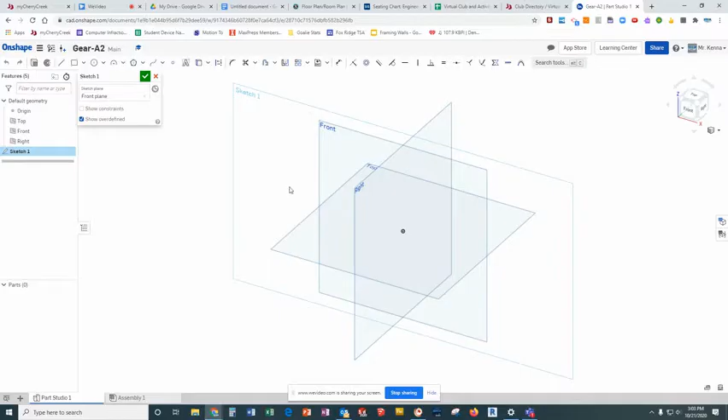In OnShape to make a gear, we're going to start out with our first sketch. Our first sketch needs to be on the front plane. So I'm going to select the front plane and select the sketch tool. You can also do that backwards if you'd like. To view the front, I'm going to come over to my view cube and click on the front so I'm looking straight at it.

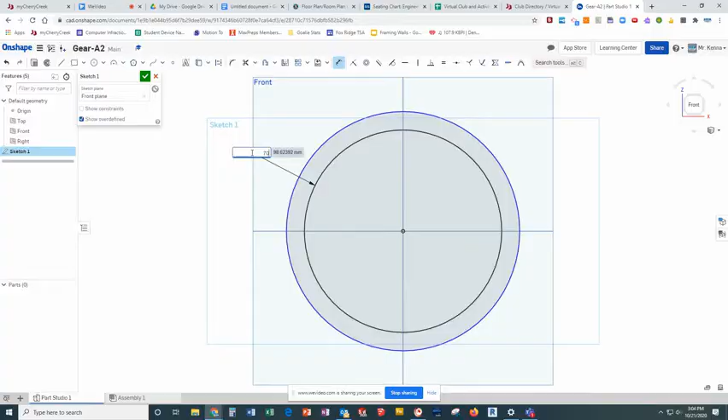The first thing I'm going to start with is a center point circle. I'm actually going to make two at the same time, both starting from the origin. Then I'm going to grab my dimension tool. The inner circle diameter is going to be 70 millimeters. The outer circle's diameter is going to be 90. That gives me about a 10 millimeter tall tooth all the way around my gear.

The next thing I'm going to do is start to add in some construction lines. When I do construction lines, I can either activate the construction first or activate the line tool first. Both just need to be blue. You can also change this later.

The first thing I'm going to do is draw a construction line straight up in the air like that. I'll hit escape, do it again, this time the other way - line tool, then construction - and draw from the center up. We're going to dimension this with an angle later.

The third one - if you happen to accidentally, as I just did, draw this as a regular line, you can select it and change it to construction later on.

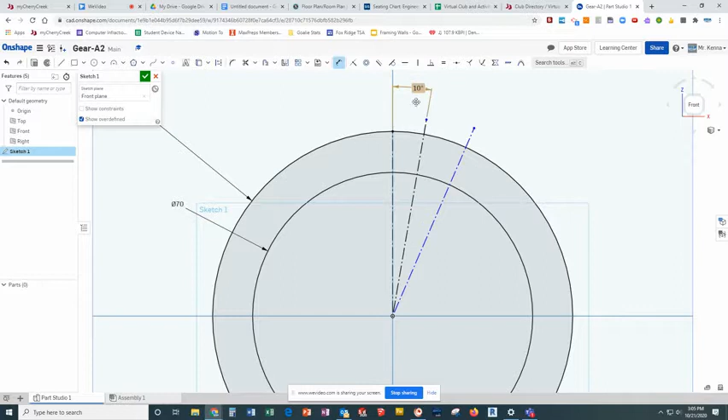Now I'm going to use my dimension tool. From the center, or the one that's straight up, to this one, in this case we're going to use 10 degrees. From this line to this line is also 10 degrees. You'll notice they get fully defined as they change from blue to black.

Ultimately what I want is to draw one tooth in this area and one valley between the teeth in this area, and get the entire profile. But if you look at it right now, if I make this the tooth, here to here to here, the tooth is wider at the top than it is at the bottom, which means it's going to get stuck and my gear is not going to work.

So what I'm going to do is use my line tool and draw from the part where those two intersect. You'll notice both of them turn orange. Click release, and I'm going to make sure I draw a non-vertical line up to here.

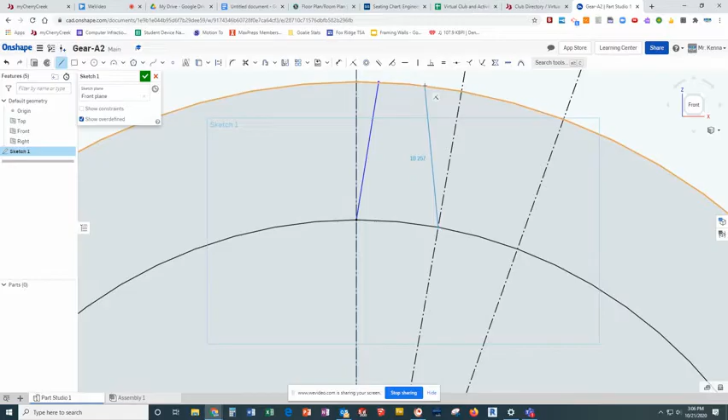I'm going to hit escape, get the line tool again, and again start where these two intersect. A non-vertical line, not parallel - don't do anything, just make sure it's coming up and touching the edge. And put that there. You'll notice they're uneven, which is fine.

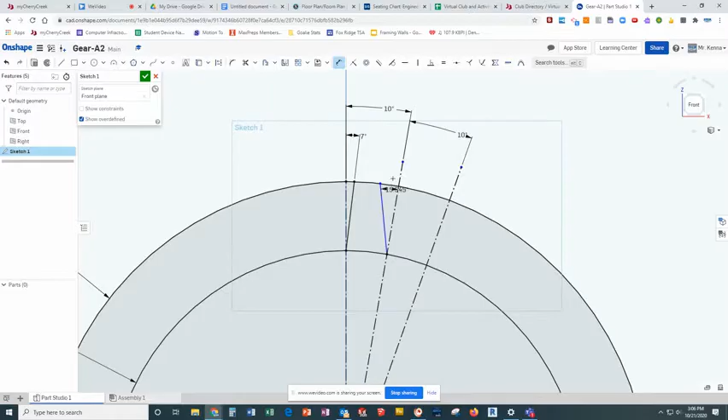I'm going to get my dimension tool, and again use a degrees dimension. Just move this down a little bit. From the construction line to this line is 7 degrees. From this line to this construction line, again at 7 degrees.

You'll notice now if I follow the profile of the tooth as being from here, up, over, and down, the tooth is now narrower at the top than it is at the base. This is going to give me a gear tooth that actually works.

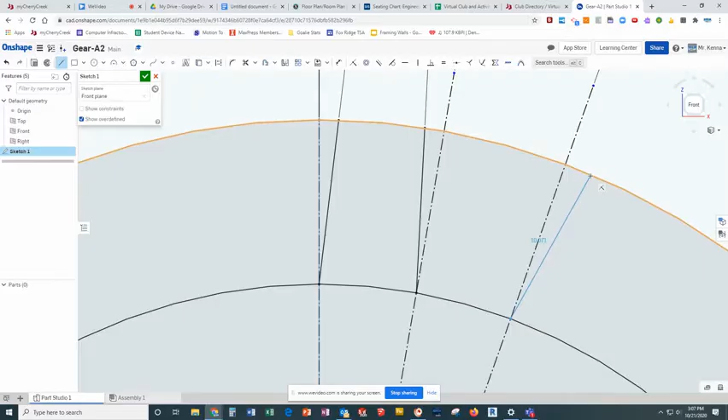Now, just because I'm going to set up a full path from here, up, over, down, over, and transitioning into the next tooth, I do need to do this one more time. So I'm going to get my line tool, start where these last two intersect, and draw up. And I'm going to take my dimension tool from here to there, also at 7 degrees. This is basically the edge of the next tooth. That's what I have set up here.

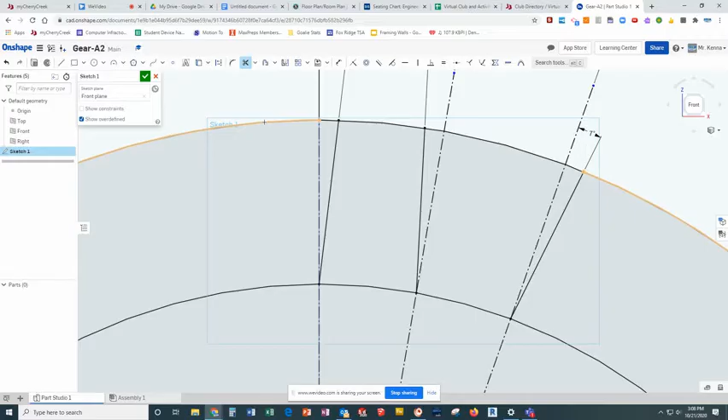Now, because I need to round these corners off, that's actually why I did this part as well - I need to round some of these corners off. The easiest way to do that first is to use my trim tool and get rid of all the normal lines that I don't need. So I'm going to click trim, and get rid of most of the circle. You can see it's cutting all the way outside my view back around to the other edge. That's gone.

I'm going to do the same thing down on the lower section as well. The lower circle, that's gone too. This little piece I don't need - it's not part of the gear tooth. The gear tooth comes up, goes over, and goes down. So this part is not part of the gear tooth, nor is that, nor is this.

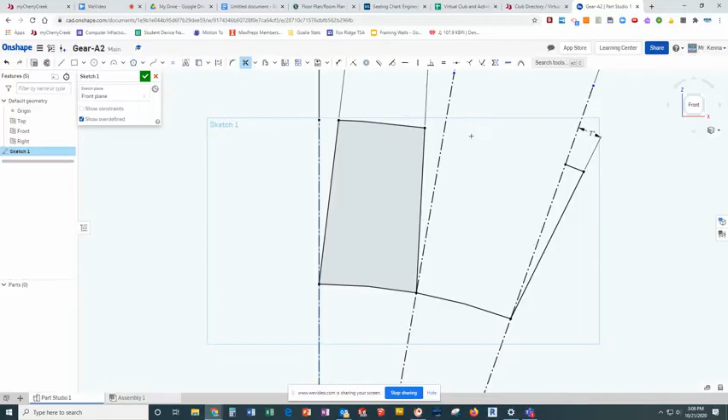I'm getting rid of all those lines I don't need. I'm also going to get rid of this line as well. Okay, I have very little left, and you'll notice none of it is filled in gray anymore.

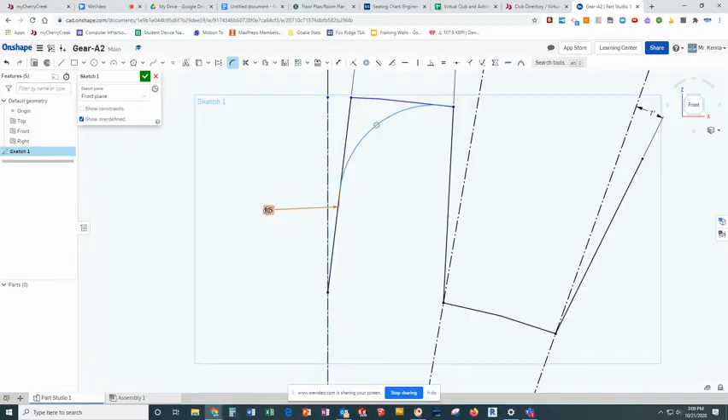My next order of business is to use my sketch fillet tool to round my corners. I'm going to round two corners. I'm going to click the two lines that make that corner, and then when this comes up, I can double click on the measurement and set it where I need it. For this case, I'm going to use 1.5 millimeters.

Now I still have the tool, so I should be able to just click the next two. As long as that's right, I click the left mouse button again. This one to this one. And the reason that extra line is there is I have to do this one to this one - make sure you do not hit the construction line. Once that is done, I now have a complete cycle.

I'm going to hit escape a couple times to get my pointer tool back. I'm actually going to go ahead and delete this line because it has served its purpose - it was literally there just so I could create this. So now I have one complete cycle.

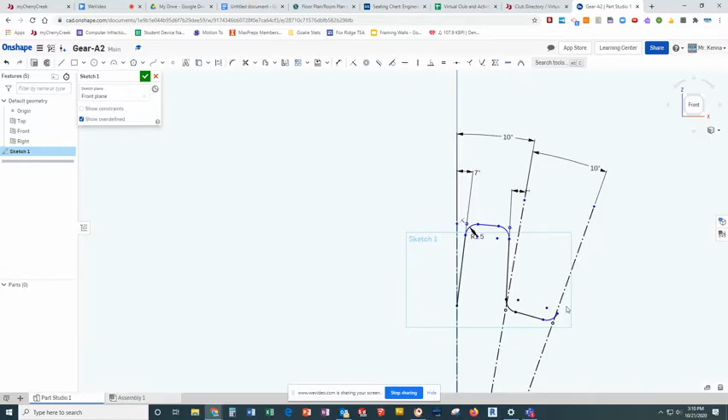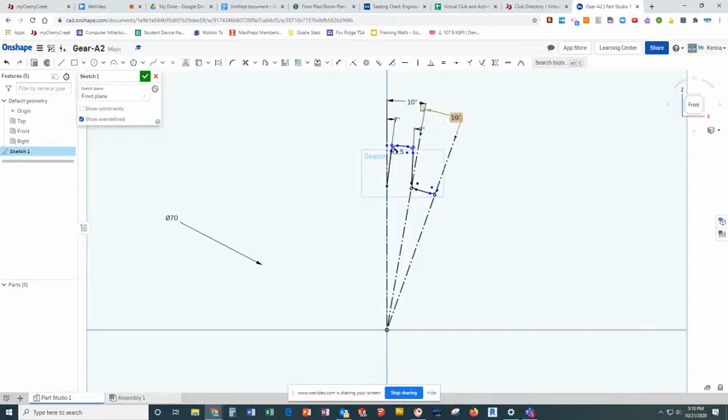I'm going to do a little bit of math to figure out what to do in terms of my pattern. I have 10 degrees for the tooth and 10 degrees for the valley, giving me a total of 20 degrees out of the 360 degrees that makes a full circle. 20 degrees into 360 means I need 18 more of these cycles.

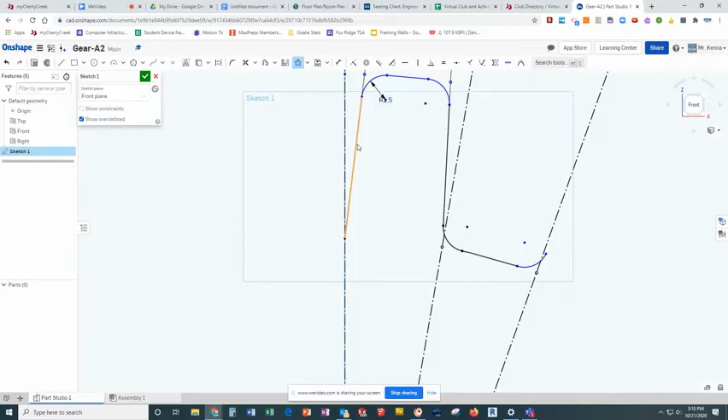Instead of drawing each and every one, I am now going to go to circular pattern. I'm going to zoom in a little bit and click all the lines I need - starting with this straight line, the curve here, the straight line on top, the curve there, straight line down to the valley, curve at the bottom, the valley itself, and this last fillet. So all of this should be orange.

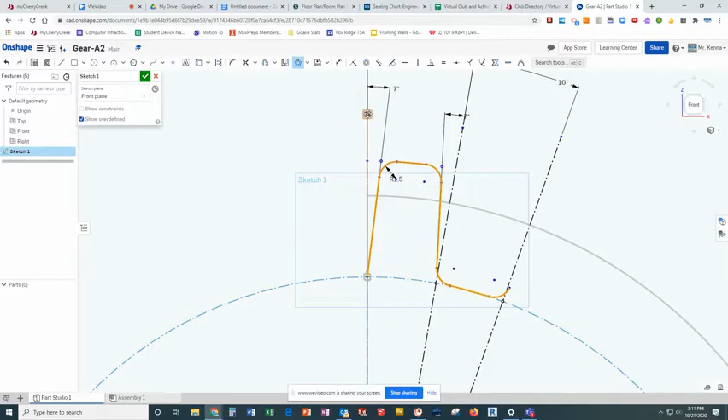I'm going to zoom out a little bit and look for the X, the 3X. This is saying it wants to make 3 of them around my 360 degree circle. The nice part is because of my construction lines, it already picked the circle there. I need more than that - I said I needed 18. So I'm going to type in 18 and hit enter.

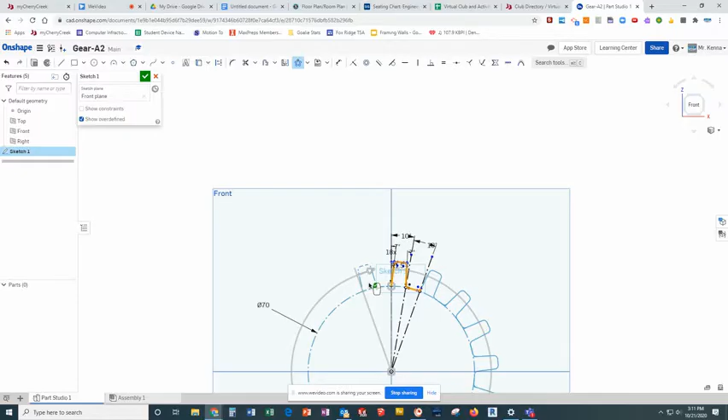As you're going to see, it's going to give me a preview of what's going to happen. As long as that's what I want - and it doesn't show all the teeth, but it does show several here and the last one - I'm going to go ahead and click accept. You'll know you did this right because the gear will fill in gray, since it fills back in. I know it doesn't clip off these little tails, but those don't seem to cause us a problem, so we're just going to leave those.

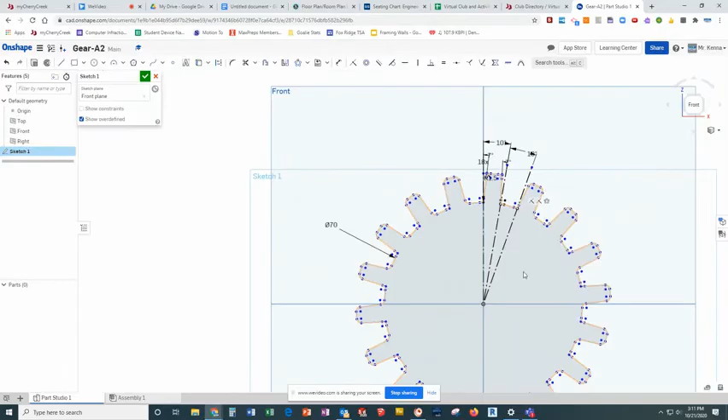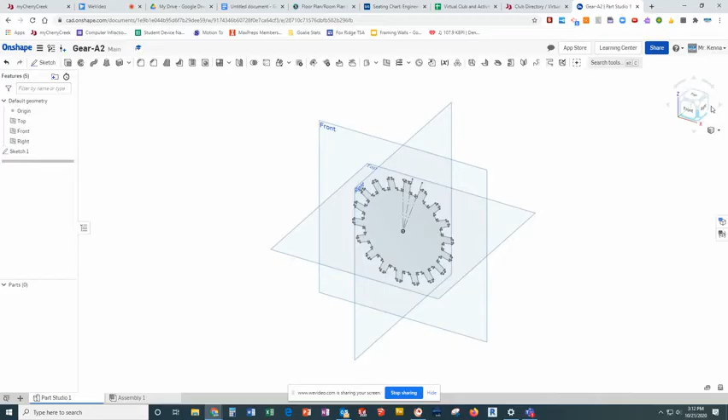This is my gear setup as far as the sketch goes. I am going to hit the check mark to close out the sketch. Now it's time to make it three-dimensional. Personally, I like to look at it three-dimensionally as I'm making it three-dimensional. So I'm going to click the very corner so I see front top right like this. I'm going to click sketch 1 and click extrude.

The thickness that I need is going to be 10 millimeters. Now, if I leave it just the way it is, it's going to come from the front plane forward 10 millimeters, which probably sounds exactly like what we want.

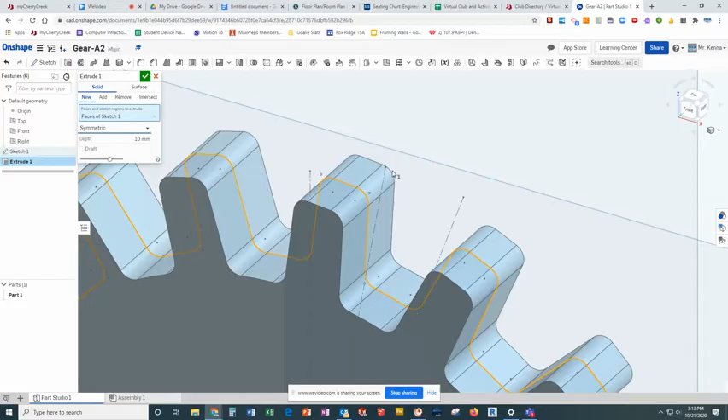However, when I plan ahead, I'm going to want to do some cuts on both sides of the gear, both the front face and the back face. So I'm going to not just do it blindly in one direction, I'm going to do it symmetrically. Let me zoom in here - the orange is my plane, that's where the front plane is. You'll notice that for my 10 millimeter thickness, it's going 5 millimeters backward and 5 millimeters forward, which since we've already done the mirror command, means my front plane can be a mirror plane if I want to do a cut in the front and have it match in the back, which we will do. I'm going to click accept.

That's exactly what I want. My next job is I'm going to go back to my front view, click on the front of this, and start another sketch. You're going to need to reduce the mass of this because it's a pretty thick gear and doesn't necessarily need to be. I'm going to get my circle tool, start at the origin, and bring this out. Now I'm going to use my dimension tool and set that at 60. That's all I need for this. I'm ready to close out of the sketch, go to my three-dimensional ISO view, pick sketch 2, and click extrude.

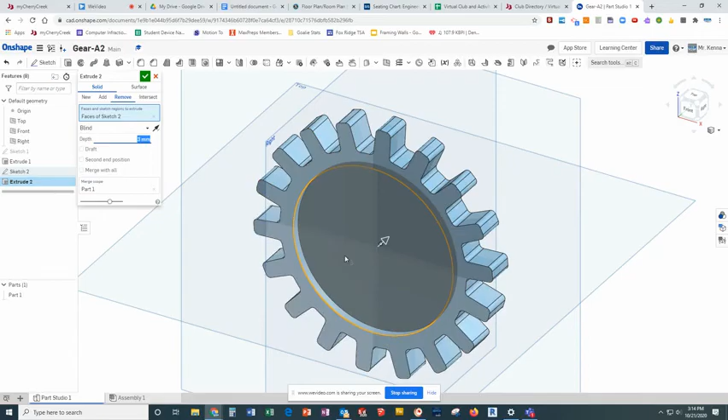It wants to add material. In this case, I don't want it to add, I want it to remove. I'm going to have it remove 3 millimeters worth of material, so it's going to cut back in 3 millimeters. When I hit check mark, you'll see that I get this nice little ring web area. But it doesn't match on the other side.

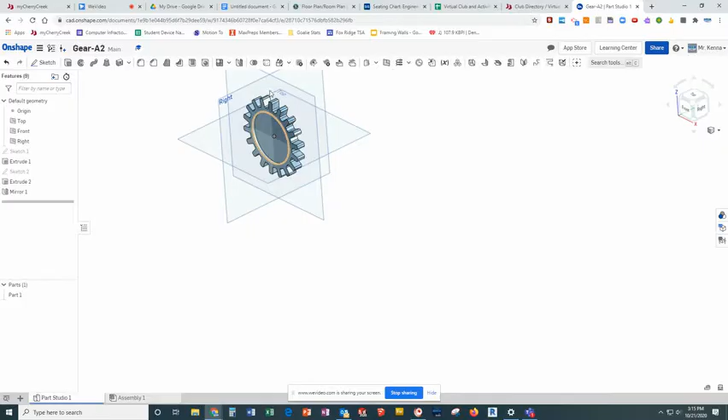This is where mirror is really, really handy. So I'm going to click the mirror tool. The type of mirror I want to do, I have to set this first, is a feature - I want to mirror a feature. So the feature to mirror is Extrude 2, and the mirror plane is the front plane of my drawing. When I accept that, doesn't look like anything happened, right until I rotate it and you realize it's cut into the back as well.

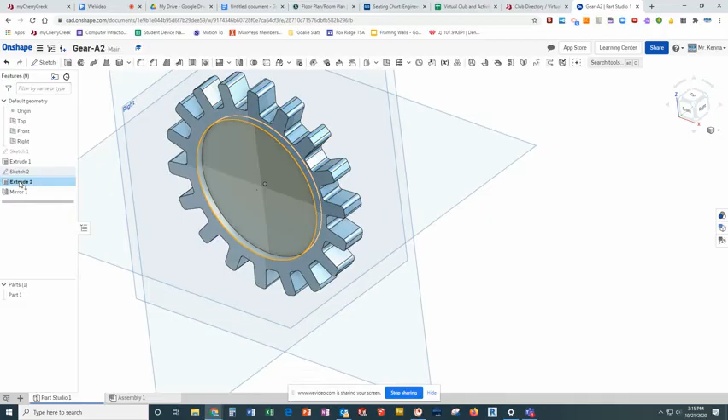So if the whole thing was 10 millimeters thick and I cut in 3 millimeters on this side, 3 millimeters on that side, that means 6 millimeters total material was removed. This part is only 4 millimeters thick - that some might see as a problem. So if I want to make a change, I'm going to click on Extrude 2 twice, and change 3 to 2. Now, here's what makes my mirror better than somebody just drawing the same circle on the front and the back: when I made that one change, this got shallower, and so did this. So the mirror keeps those two features connected, and that's really a handy thing.

Now I'm going to start to add an area where I'm going to cut a hole through the gear so the gear could go on a shaft. I'm going to click in here, start a sketch, and look at the front. As we've done a couple times, and we'll do a couple more times, I'm going to do a center circle from here out, and I am going to dimension it. This time, this is going to be 25 millimeters. I am going to hit extrude.

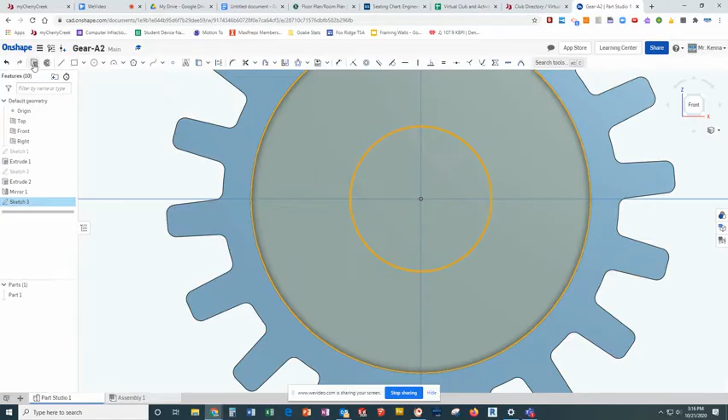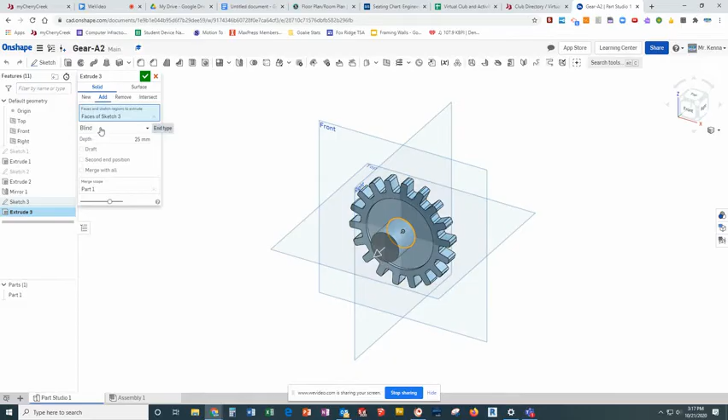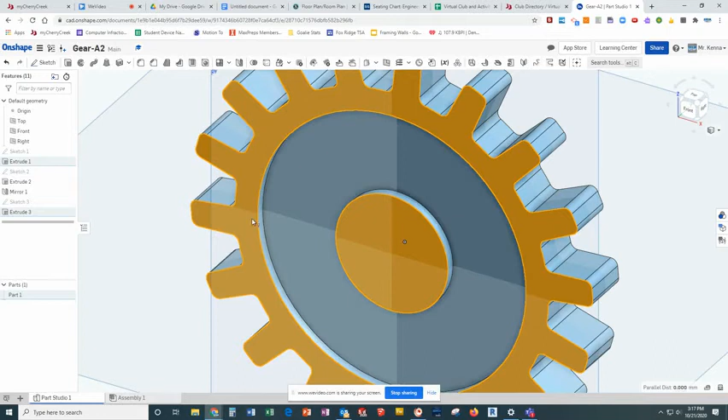And I'm going to add material. I am going to change my blind to be up to face. Now let me actually change my view real quick before I change anything. Instead of giving it a dimension, I'm going to change it to be up to face, and I'm going to pick this outside face. So what that's going to do is add the material back here, and keep this face and this face lined up together. So if I went back in and changed this one, this would change with it, which is a nice feature. I'm going to zoom out so I don't have anything selected.

Now the question may be, can I mirror that to the other side? We're going to give it a shot. It's again a feature mirror - Extrude 3 is the feature, mirror plane is the front plane. And it'll only tell us if it's wrong.

And it is wrong. The reason is that we can't do that because of the type of extrude that we did. So I'm going to look at the back, and I'm just going to do the same steps again. Start a sketch, circle tool, middle, out.

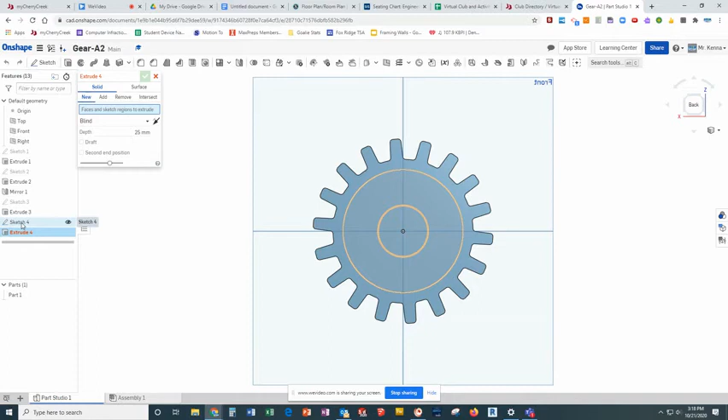Dimension is 25. Accept it, extrude it. Sketch 4 is what I'm doing. Adding material up to face, picking the face, and accepting it.

Now, whether I do it from the front or the back, I can now click on this face, start a sketch. I'm going to look at it directly on. I'm going to go to the center, make a circle, dimension my circle using the dimension tool at 15 millimeters.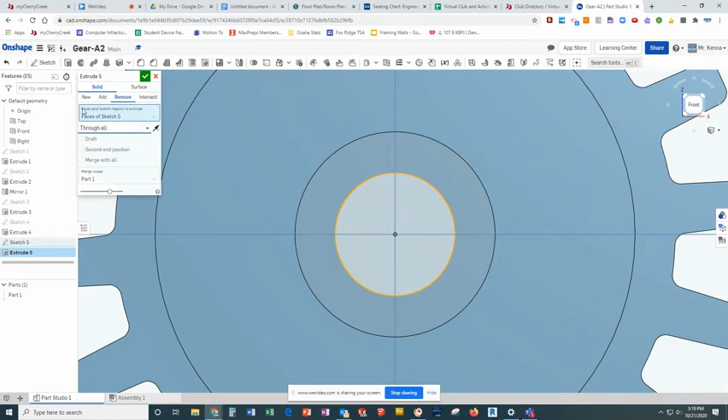I'm going to hit extrude using sketch 5, removing material, and instead of setting a distance, I'm going to say through all. This means if I change the thickness of the gear, this hole is going to always cut all the way through. That is a wonderful thing. And again, when we look at it three-dimensional, here we go.

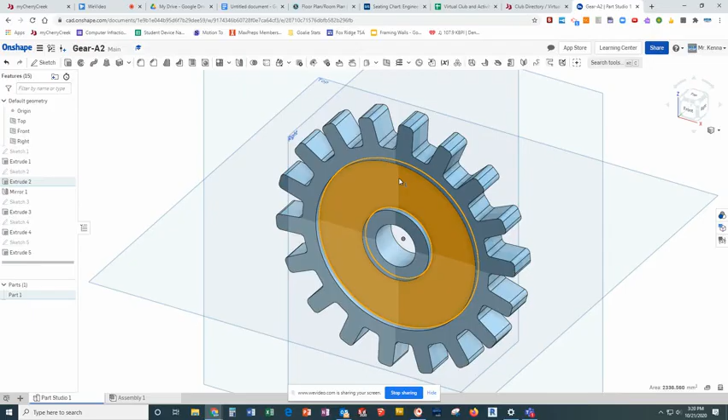Last thing, I do want you to add a feature that helps to reduce the mass of this area, because this does not need to be that solid. You do not need to do this exactly as I do. In fact, I would like for you to use some of your own creativity in how you do it.

Here's one option. I'm going to click on that area, start a sketch. I'm going to just draw, for the sake of time, a very simple circle. You've seen several different ways to do that, and I'm going to use my dimension tool to say this is a 10 millimeter circle.

I'm going to actually move it to about 20 millimeters up. That's where I'm going to choose to put it. Actually, I don't love that, so I'm going to start bumping this up. Let's try 22. It's actually a little high. I'm going to try 21. That actually looks pretty good. So it's kind of centered in this area. That's what I was looking for.

I'm going to click accept the sketch. I'm going to click to remove material. I'm again going to tell that to go through all. And the face is that one. And here we go. Well, that's just one cut.

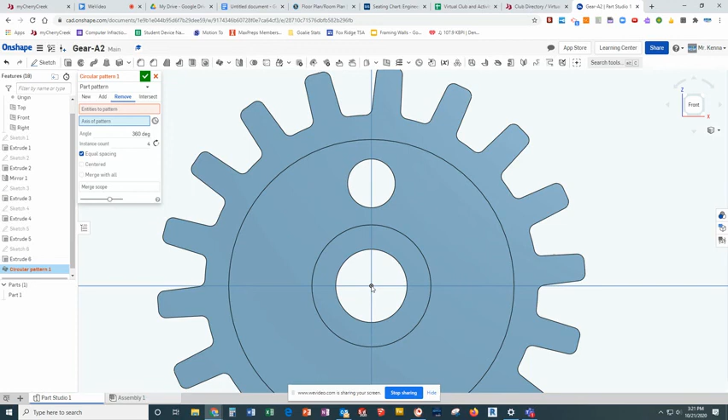I don't want to do that a bunch of times. You'll notice that I can also pattern a feature circularly. So circular pattern, entities to pattern is going to be this extrude cut. Sorry, under remove. Extrude cut. We're going to go 3D.

It's not letting me pick. Part pattern, sorry, feature pattern. Here we go. Features to pattern. That one. Axis of pattern. It's not giving it to me. Let me see, axis of pattern. Let me see if it lets me select the circle.

Instance count 4. So I can bump this up. I don't need to just leave it as 4. I picked the center circle because it's going to move it around the circle. I can bump this up. I can do it 7 times. Okay? I could do it 9 times. If I do it too many times, it's going to start to get really close.

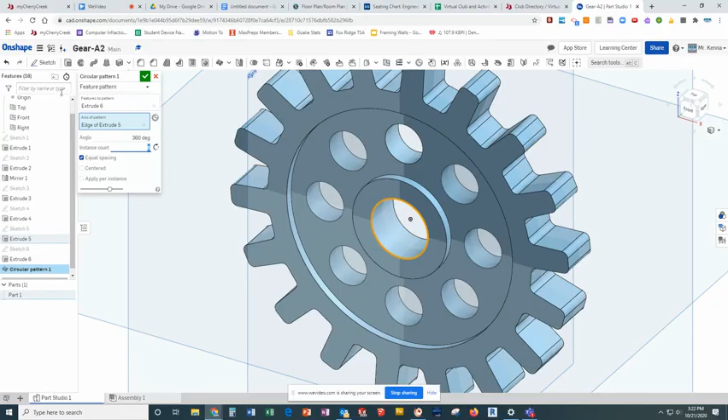So I'm going to leave it at, you know what, I'm going to do 8. So we're going to do 8 occurrences. Again, don't make yours match mine exactly. But this is what I'm looking for.

So we've got a gear that's thicker, that has a reduced area, that has a little hub that's nice and strong where it meets whatever it sits on. And then I used my circular pattern of features to go ahead and get this all set up. This is the end of the gear. This is where I want you to get to.

Please make sure you save this. And in future videos, we'll go over how to create a smaller or larger gear that will mesh with this, and a little bar where you can actually set them all up as an assembly and rotate your gears, and they will work virtually before you do anything with them.